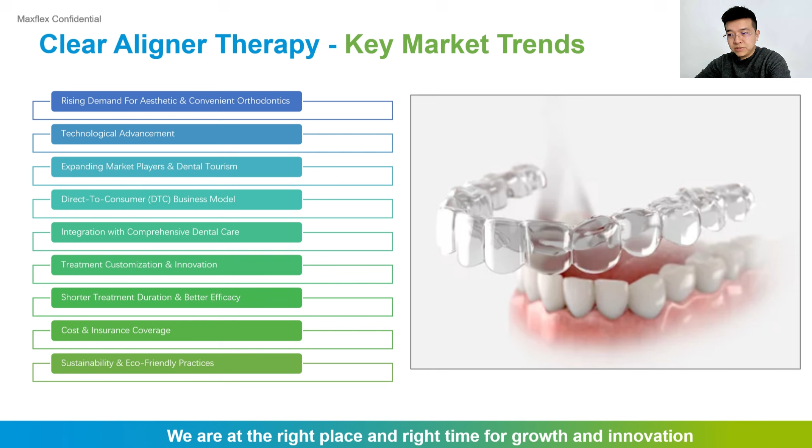Integration with comprehensive dental care, treatment innovation. Also including cost, insurance coverage, sustainability, and eco-friendly practices. Anyway, we are at the right place and right time for growth and innovation for all the participants.

As Maxflex, we are providing the most, which is based on the idea of self-determination and patient centricity. We are empowering the practice for all three roles. First is the integrated brand owners, and the dental service organizations like dental labs, clinic groups, and also the orthodontists

and GPs, general practitioners. So as we build in the aligner capabilities, we design a production journey, starting from the patient impression, data established by our intraoral scanner, treatment planning, 3D printing models, thermoforming, trimming, polishing, and delivery.

Also, when we start with the one-stop solutions, we are always doing the development things like product data analysis, material selection, processing equipment, post-process, QC control. Also very important is the product acceptance. It's a very long journey we go through, but it's very essential. As the most, the three major parts combined are the service, products, and innovation.

So today, I'm going to share the processing equipment part of the most. Also, there'll be 5 market trends for the processing centers. As we explored so many countries and regions, we found out the customer needs and the market trends: we need multiple points of production, because clear aligner is a very fast business. It requires a very fast local supply because patients and clinics don't want to wait. So close proximity to point of care is very important.

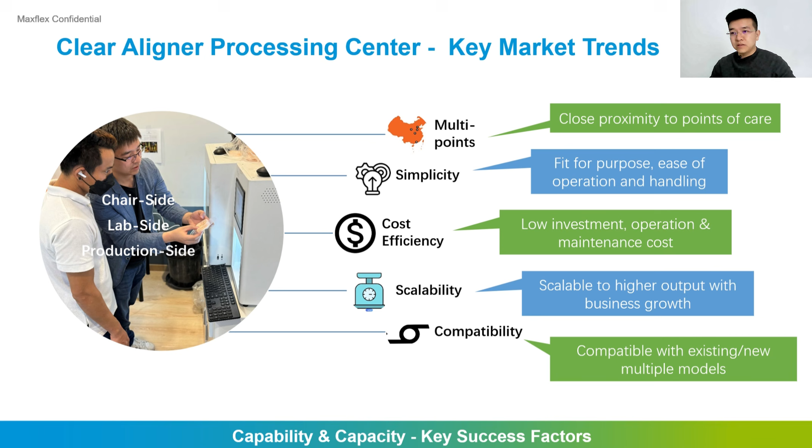The three major roles in the market have different needs. For integrated brand owners, they need special treatment cases. They even need customized materials and outsourcing innovation ability. And the dental service organizations like clinics and dental labs need a startup investment. They need multiple points, local delivery, efficiency, lead time, operation cost, scalability for growth.

This is the most important group for the most system as we explore the market trends. And the third is the GPs. They need self-reliance, operation know-how, skill set and efficiency, a steep learning curve, financial flexibility, and economy of scale. So each role has different needs, but as the most we will provide all the things.

So let's talk about the three-leg stool. As we are designing the solutions, we must have some basic ideas of how we want these solutions to look. So we have 3 major points to think about. First is efficiency. The solutions, the machines, the processing software must be as efficient as they can be for different roles. If it's very low efficiency, it's not easy to use because it's not worth it.

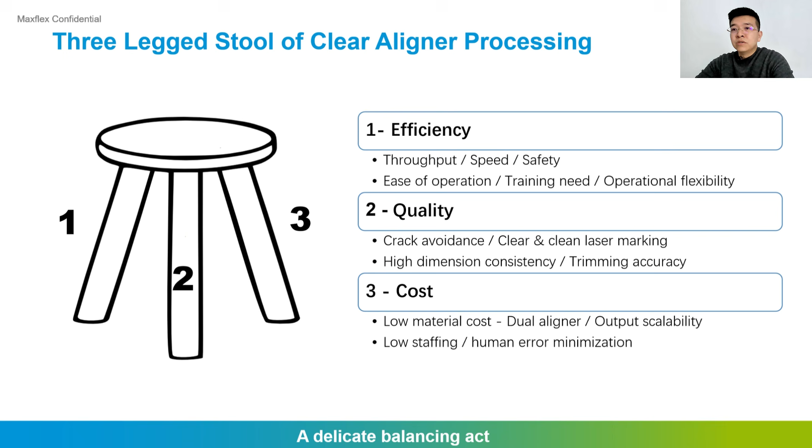So as we talk about so many market trends, the ideas about the solutions, and their needs and market demands for each role, we have the 4 major machine parts to combine as the Maxflex aligner processing solutions. First part is the printing part, also including the post-processing machines. Second is the thermoforming, Maxform L2, third is the laser marking, and fourth is the trimming. So we will expand the discussion about each part one by one.

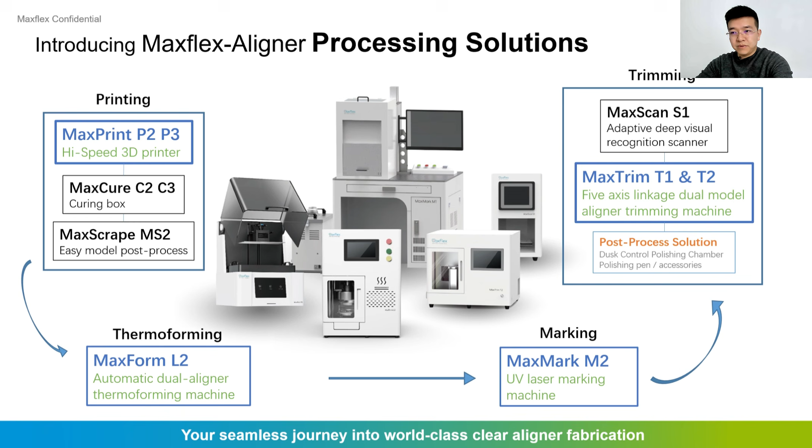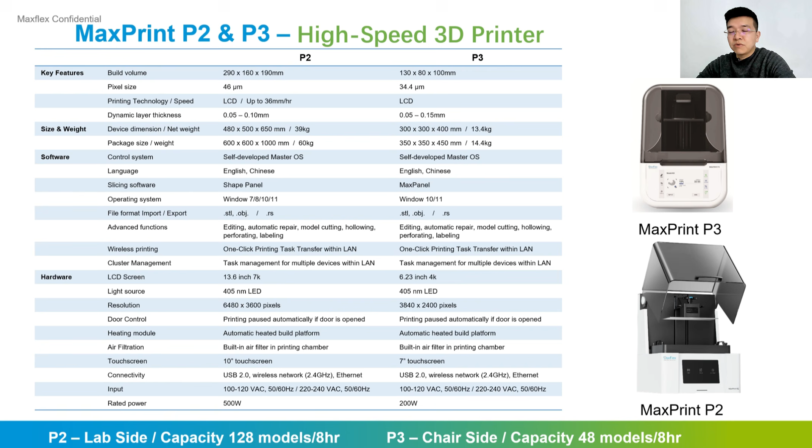So first is the printing part. We're providing the MaxPrint P2 and P3 for the market. Both of these printers are LCD printers. The MaxPrint P2 is used for the lab side, and the MaxPrint P3 is suitable for the chair side. So these 2 different printers provide 2 different roles.

As for the technology of LCD, when we were looking for the final idea about the printers for the clear aligner part, we need very good cost performance, because DLP is very good, but sometimes it's not so good at the edge, and also the cost is very high. It's always like 5 times that of LCD printers.

When we think about SLA, which is a very mature technology, it can print a lot of models at one time, but actually the time span is quite long for SLA, and for the operation part, it always needs people to manually remove the model from the printing platform, clean, and restart everything. So the manual work is really heavy for SLA printers.

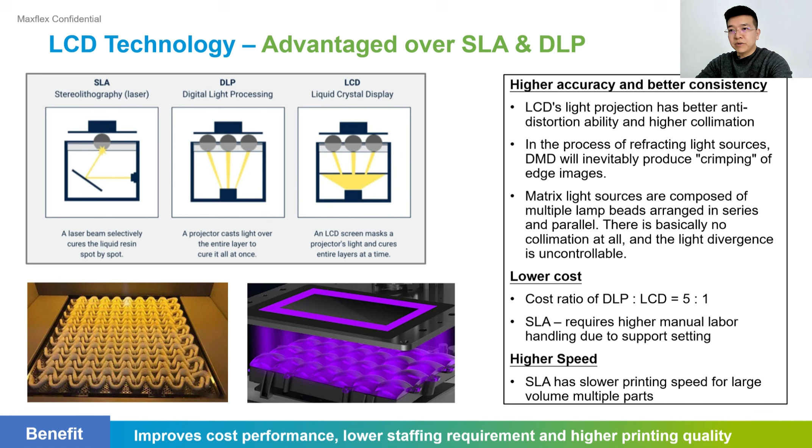So LCD printers are even better for the clear aligner part, because the cost is not so high, but the precision can be very high, even close to DLP printers. So let's see how we compare the precision of the models that we printed with LCD printers. The STL file is a widely used file format for 3-dimensional data.

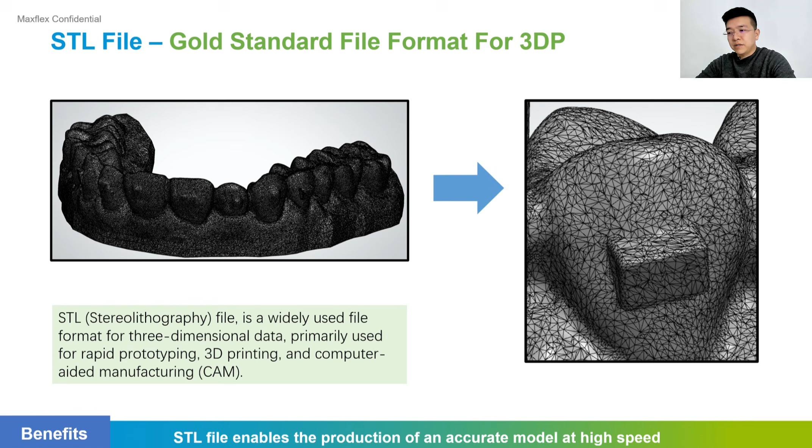Anything generated in STL is like thousands of triangle faces connected together to generate the 3D models. So each model has so many points on the surface. This is the basic idea of how we do the comparison. When we're talking about printing precision, we always need to know how we judge the printed model. Is it precise or not?

So the method for the model precision judgment is that we need to scan the models after printing and compare with the original STL file within the 0.1 to minus 0.1 range, and see how many points are out of the range of 0.1 to negative 0.1. If more than 90% of the points are within this range, we think this model has very good precision, because it's almost close to the original model based on the points.

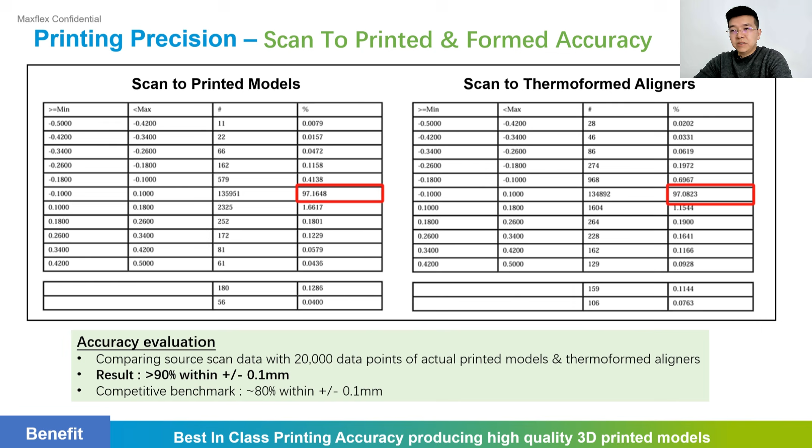So also we want to see the thermoforming results, because the final result that we get in our hand is the model that has been thermoformed. Also we need to think about it: we don't want to print solid, we want to save material. So what kind of construction do we want to use? Based on these questions, we looked for the answer.

The answer is that we prefer to use the honeycomb construction, and the thickness we can set at 2.5 millimeters. With this construction and thickness, printed with the MaxPrint P2, the result shows a 99% match to the original model. And after one thermoforming press, it's 98% compared to the original model, which is already very high.

And it's already above our standard of over 90%, because we think 90% is a general standard that fits all clear aligners for accepting the precision of the models. The second time is 93 and the third time is 86. Mostly people only do one pressing, and sometimes when you have some work that needs to be redone, you do two pressings with this construction. So these two times are already above our standard of 90%.

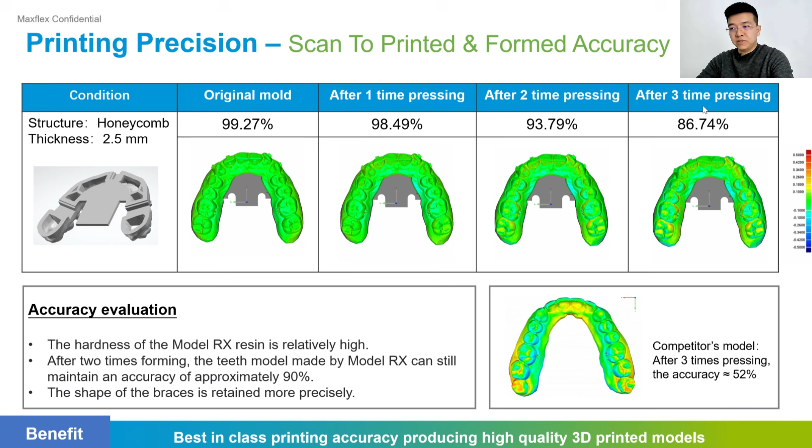Also when we look at the details of a good LCD resin, it's very smooth and clean. But with other printers, sometimes the details are really rough, so we cannot imagine if this can really fit the patient's mouth.

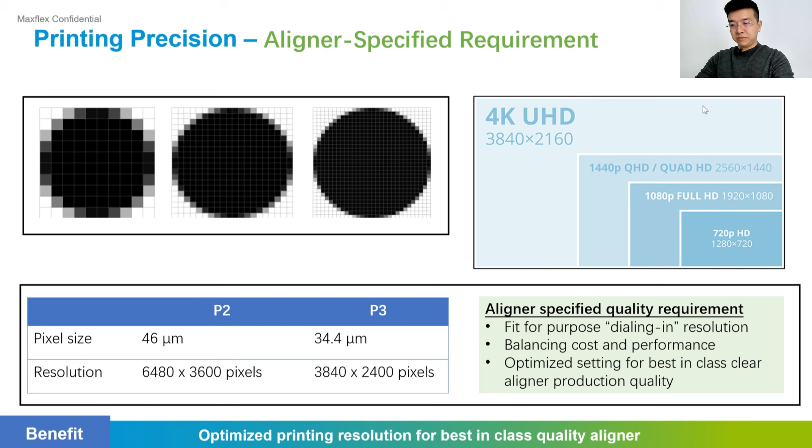So how can we guarantee the precision? We provide very high pixel screens: P2 we provide 7K and P3 we provide 4K. These two high resolution LCD screens are basically the idea to provide such precision results. And we also have the printing processes for pre-processing, build up, and post-processing. We provide the MaxPanel for slicing and doing the honeycomb constructions that all the slicing software can provide.

With the printing set, the P3 can provide two models in 20 minutes. For the clinic side, you can produce one pair of retainers, and P2 takes 40 minutes for 12 to 16 models. So in one day you can have more than 100 models per 8 hours. We also have monitoring and control for the temperature and display of print progress information.

For the post-processing part, we have the C2 and C3 for curing, with very strong LED lights. So we only need 1 minute to cure all the models after printing.

Thinking about lab production, user-friendliness is quite important. So we provide a MaxScrape machine to lab users. After you print with the P2, you can transfer the printing platform to the MaxScrape machine, and a knife cuts off all the models on the platform within 1 minute. So there is no human removal work after printing, which is much faster and easier work for the lab side.

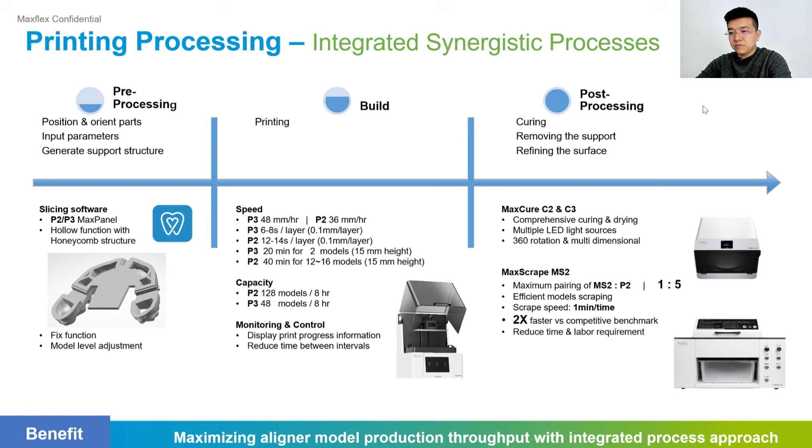So the idea for this solution is to provide a high precision model, a very user-friendly operation, and a fast printer setup. And for the printing volume, we already tested that it can hold 16 medium size models with the P2, and you can also print more or less depending on the model size.

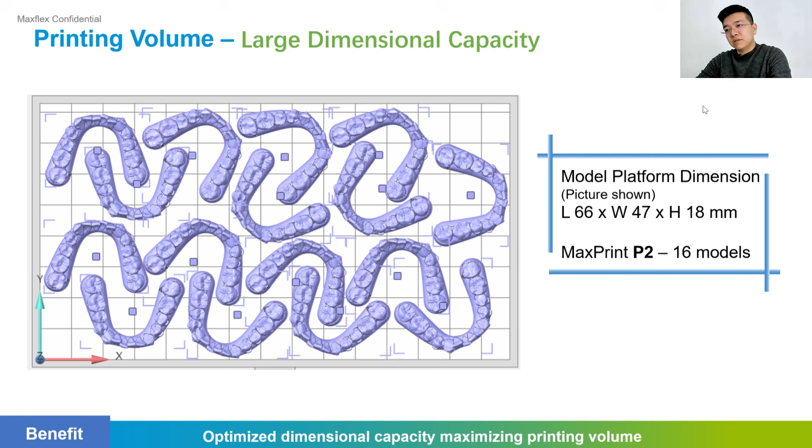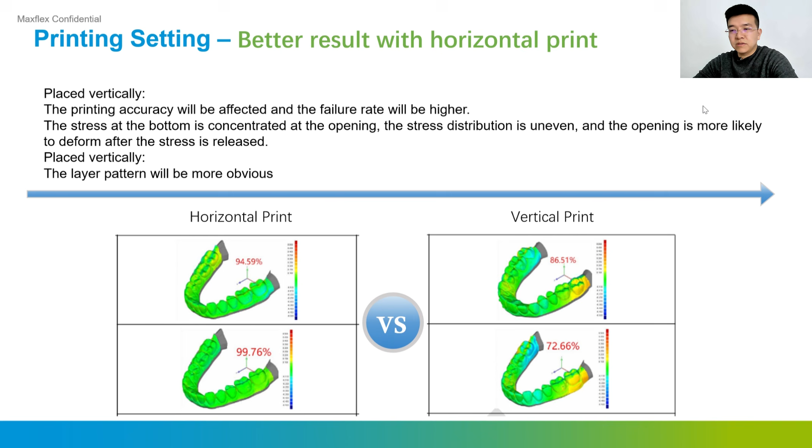We suggest always using horizontal printing. As we tested horizontal printing results compared with vertical printing, the comparison shows that horizontal printing is higher precision than vertical. When printing vertically, the construction has only two small parts connected to the printing platform, which makes it more likely for the shape to change during printing and also after curing. So we really suggest printing horizontally. It's faster, more stable, and more precise to guarantee the result compared with vertical printing.

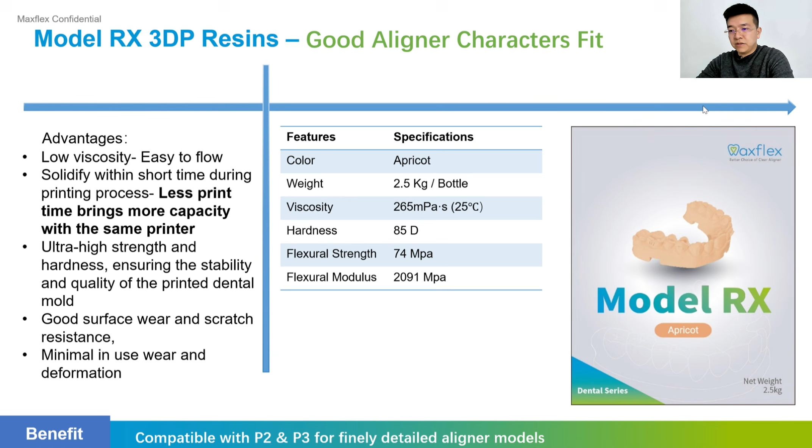The biggest advantage of the resin, and a very sensitive consideration for the user side, is the smell. If you really care about the production side, you will always think about the health of the employees. The smell is really important because a low odor resin liquid reduces VOC emissions, so it reduces health risks and improves user comfort.

But why does resin smell? Because the raw materials of low-cost resin liquid release more monomer into the air, which results in a heavier odor. Less smell provides a better environment for operation, but it brings cost. Still, we have to think about it because it's about health. We don't want the resin to cause too many problems for daily operation. Otherwise, it will increase the risk for the whole company on the employee health side.

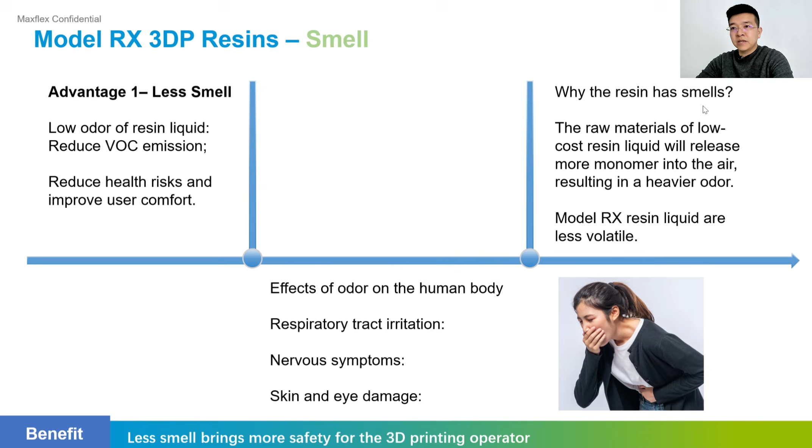When we print, accidents can happen, models fall on the ground or operations don't go well. If it breaks, you need to do the work a second time, which costs more production time. So a high success rate for printing is very important to make sure we only need to do the work one time, saving the most resin, time, and cost.

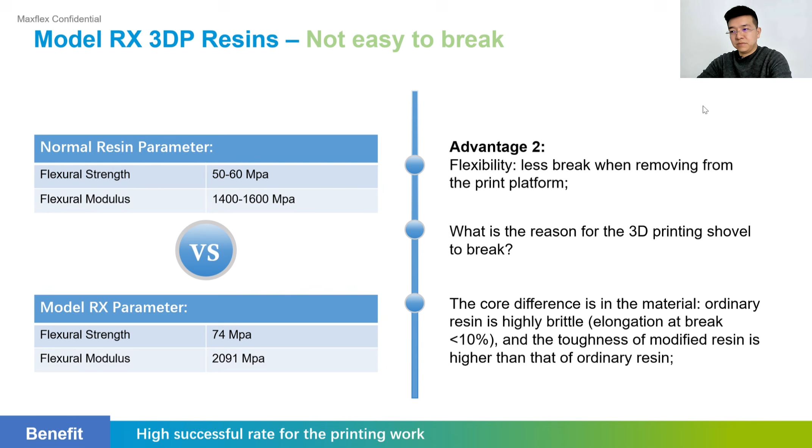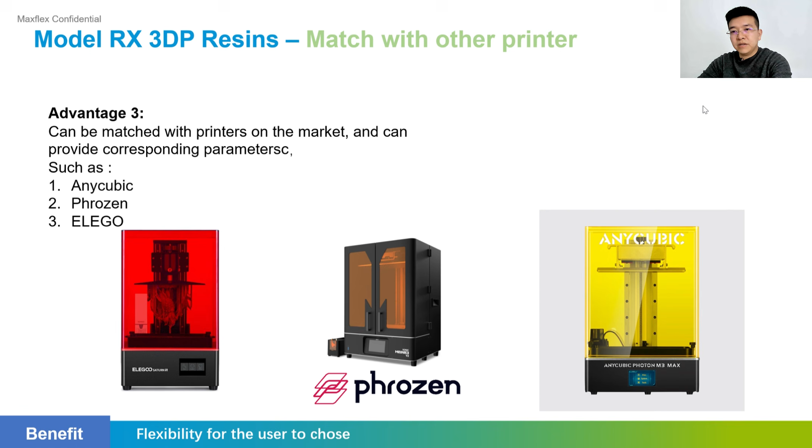Also, this resin can match with the major popular printers on the market, like Phrozen, Anycubic, and ELEGO.

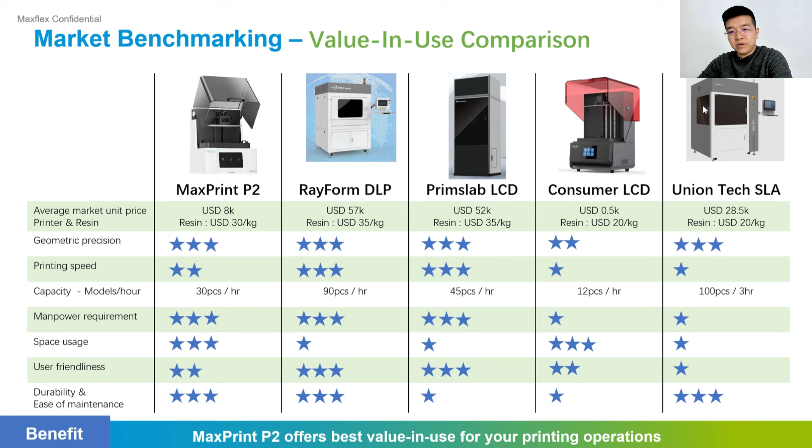Comparing with all the printers on the market, the Maxprint P2 is always good at the following points: geometry precision, printing speed, manpower requirement, space usage, user friendliness, durability, and ease of maintenance.

Many customer clients think about consumer printers because they are cheap and easy to obtain. But when comparing the four major parts between the Max Print and consumer printers, the integration of the modules is not as high as the professional part.

Also, the light source in consumer printers doesn't have very high control over the uniformity of the light, and even the cooling system is not sufficient. That's why it cannot bear long-term, long-time printing.

Also, the platform has no preheating function, so when you print in a low temperature season, the printing failure rate will rise. That's why we provide a print platform with a preheating function.

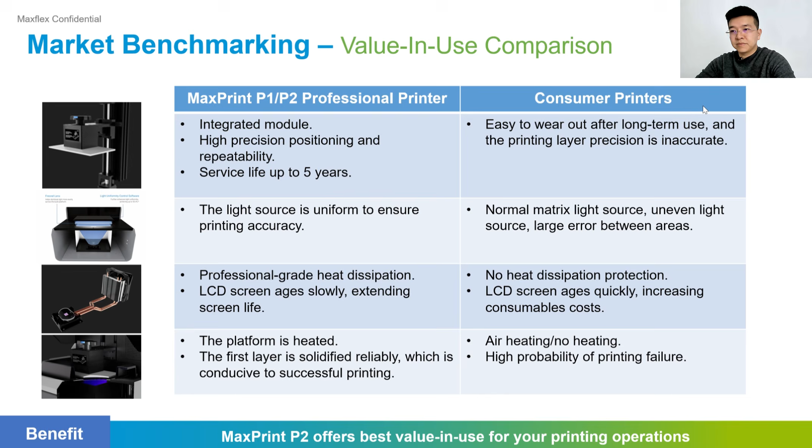All these actions make sure the operation provides a high successful printing rate. Now, talking about thermoforming, we're going to show our very famous product, the Maxform L2.

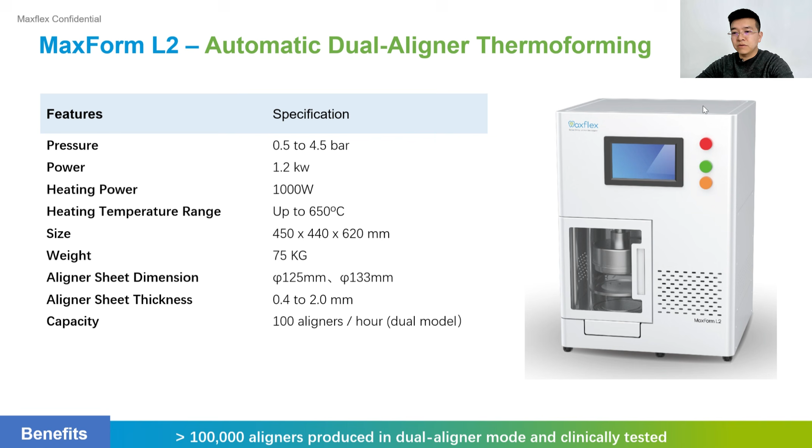The Maxform L2 is a very unique thermoforming machine. It can thermoform 125mm and 133mm sheets, and can accept sheet thickness from 0.4 to 2.0mm. It's fully automatic on the operation side.

Before talking about the machine side, its revolutionary geometry design means one sheet can provide two models of thermoforming at a certain size, which really saves 40% on material costing and even energy costs.

Because you only thermoform one time, and then you get two aligner results. Otherwise, compared with a traditional thermoforming machine, you would have two operations, meaning two times the energy cost and two times the manual operation.

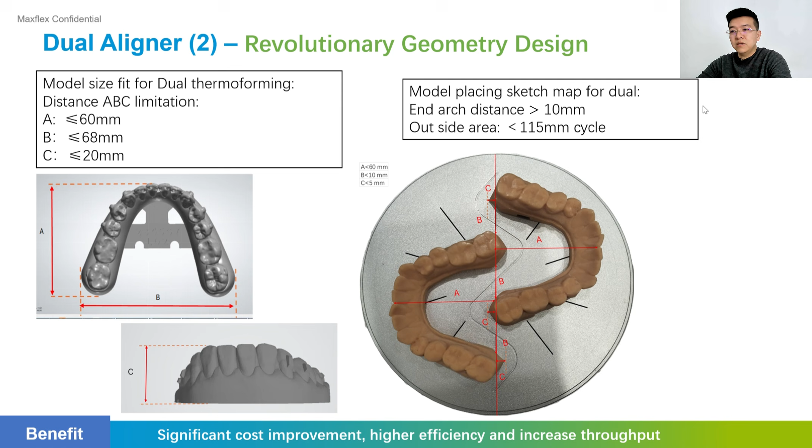For the dual thermoforming design, the size limitation we set is 68mm for the width, 60mm for the length, and 20mm for the height. For placement, we have prepared suggested areas on the thermoforming plate. Since we need to plate on two sides, we make the distance between the arches 10mm.

The reason we can provide 133 sheets for two models is that we have CT scanners to scan the thickness of the aligners after thermoforming. During R&D development of these machines, we tested a lot of results to detect the thickness.

The thickness of the aligners can be guaranteed on the front side, where the result will be close to single thermoforming results, from 0.4 to 0.66. It also depends on the different shape.

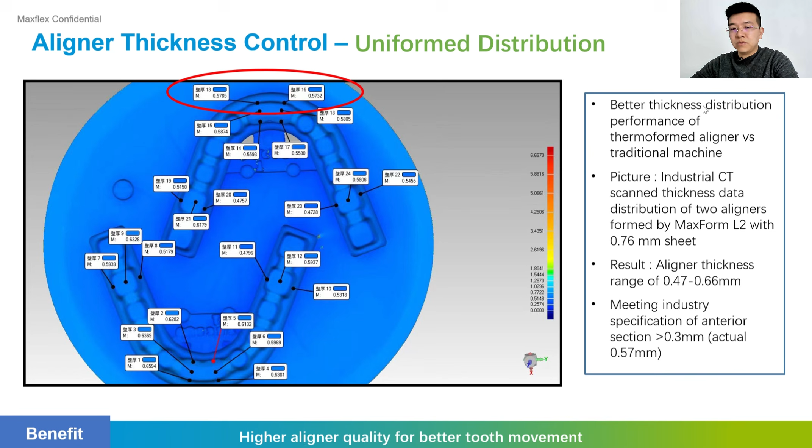But the core part of the L2 machine is the heating control system, which uses advanced ceramic heating elements. The idea of ceramic heating elements is that they provide very unique, even heating, because we always set the temperature at 500 degrees and it holds at this temperature.

Other thermoforming machines always have the electronics switching on and off, so the heater's temperature is not as even. That's why with the L2, we can guarantee each sheet goes from room temperature under the ceramic heaters and receives very similar heat throughout. This means each sheet gets similar energy from the heater, and the softness of the sheets will be close to the same.

We tested 4 points on edge and 1 point in central. This is a special design for the ceramic heaters that achieves this result. The consistent heat sheets rheological behavior is quite similar, so it will ensure uniformity of the thermoforming outcome of aligners.

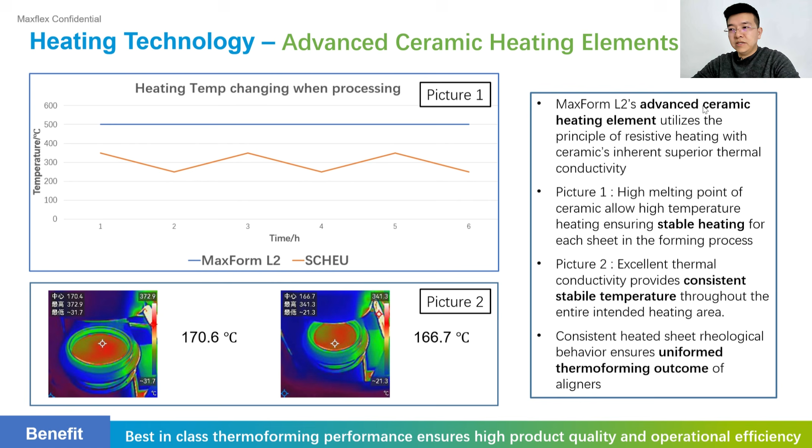That's the most important part for the MaxForm L2 thermoforming machine. It can provide very certain results to the production side, providing consistent results that ensure quality is at this level.

As we explored more ideas about these thermoforming machines and heaters, when we only use one sheet under the thermoforming heat, we observe the thickness at the lowest point, how it changes under these heaters. We can see with competitors' machines the thickness is already 0.52, while the Maxform L2 is still holding around 0.6 millimeter thickness after heating. So the thickness can be maintained more than other competitors.

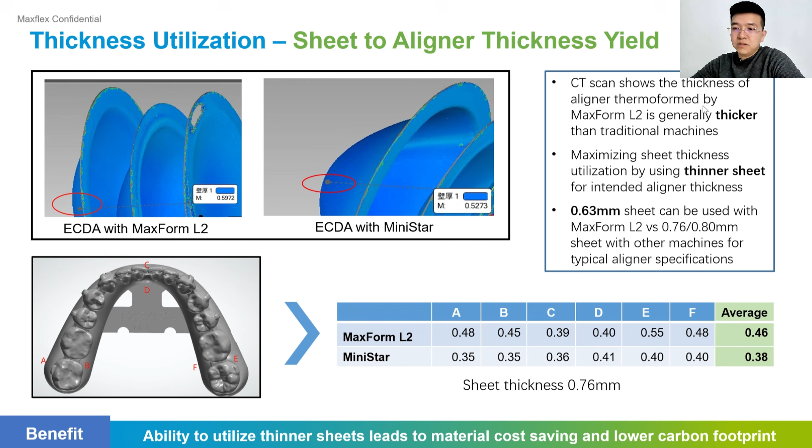As we tested with a real case, the average thickness within the sheets we use is 0.76, so the average thickness of the aligners can be thicker. Based on this, we did more tests.

We tested a higher model and a low model, comparing competitors' thermoforming machines with the L2. We also detected the thickness at the point 1 millimeter above the teeth and gingival boundary. At these 6 points, we found that aligners pressed with Maxform L2 have a thicker anterior tooth area, approximately 0.1 millimeter thicker than competitors' products, which provides better force retention for the clear aligners. For model height, it didn't show a different result.

This means that even with a higher model, we can still maintain higher thickness of the clear aligners, especially on the front side. This guarantees the treatment can be more predictable, and each step can be more precise on the patient's mouth.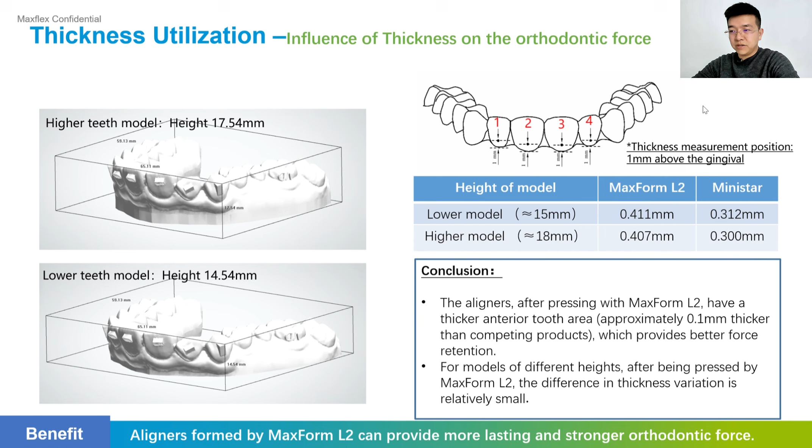So aligners formed by MaxForm L2 can provide more lasting and stronger orthodontic force than other thermoforming machines on the market. We also designed it to be very easy to change machine kits, so it can support multiple material types and thickness ranges, and can change between 125 millimeter kits and 133 round tooling, with the same machine.

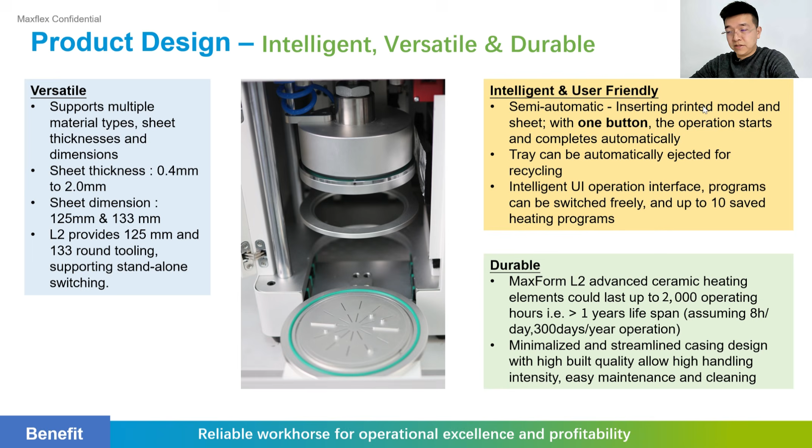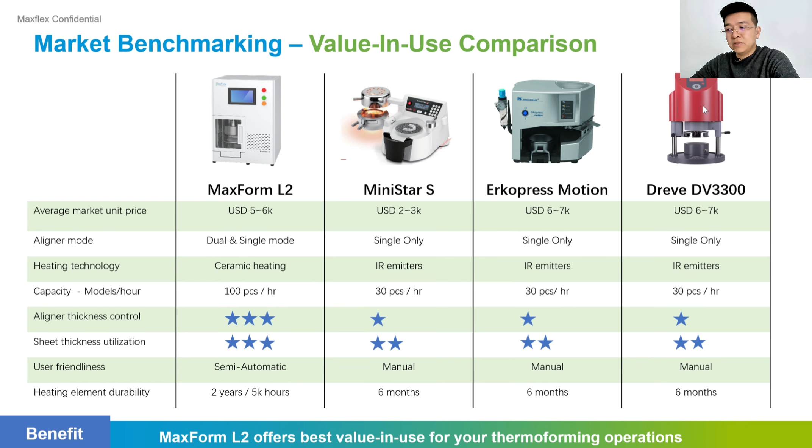Compared with the market, the MaxForm L2 thermoforming machine performs very well in aligner thickness control and sheet thickness utilization. Also, heating element durability and high aligner model production is much higher. So it will provide the best value in thermoforming operations.

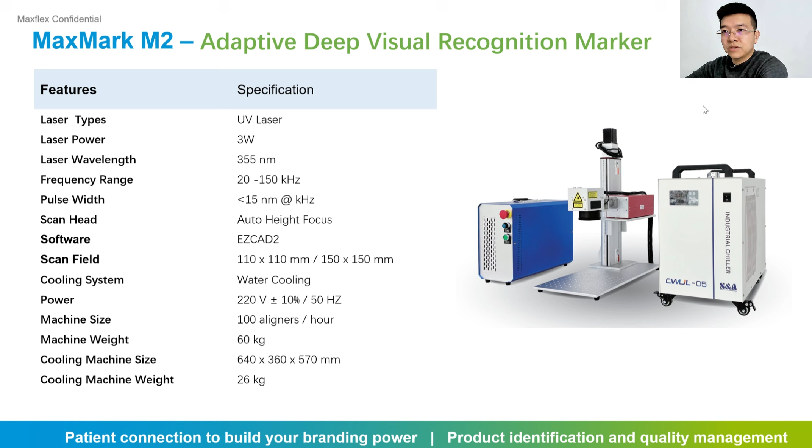Now about the MaxMark M2, the UV laser marking. In most dental labs, they need UV lasers to laser engrave information on the aligners, so we also provide such UV lasers. It's a 3 watt UV laser.

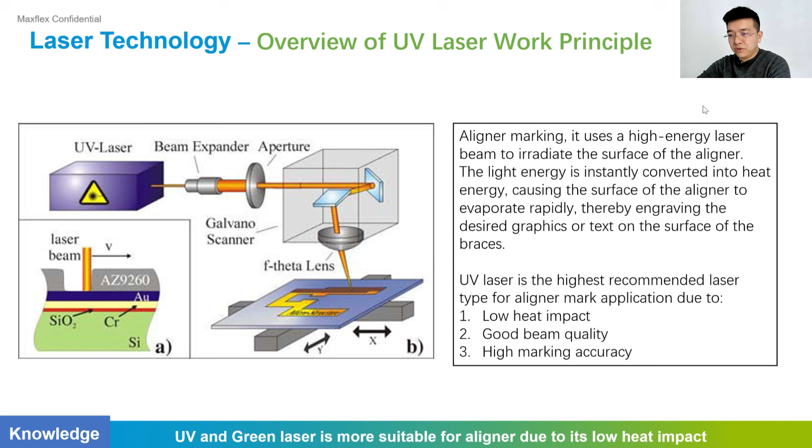We need to figure out how the UV laser works, because it's a high energy laser beam, and the result is that it can provide low heat impact, good beam quality, and high marking accuracy. There are three major lasers on the market.

First is the fiber laser, second the UV laser, and third the green laser. The fiber laser is suitable for metal laser engraving, not for plastic, and clear aligner material is actually a kind of plastic material. So the UV laser will be the best one for laser engraving plastic.

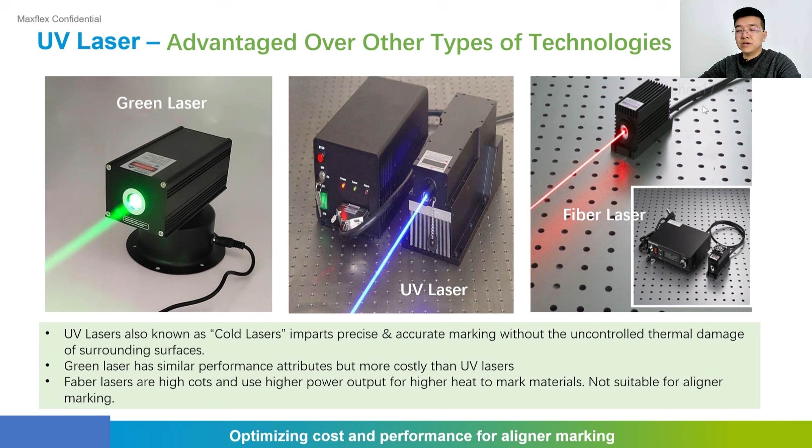But the green laser can also provide good laser marking results, though the cost is much higher than UV laser. So considering the three options and the cost, I think the UV laser will be much more sufficient and enough for lab users.

So let's see how the UV laser can laser mark. We can laser mark logos, we can laser mark patient information, and it's very reliable so you can consistently use laser marking every day.

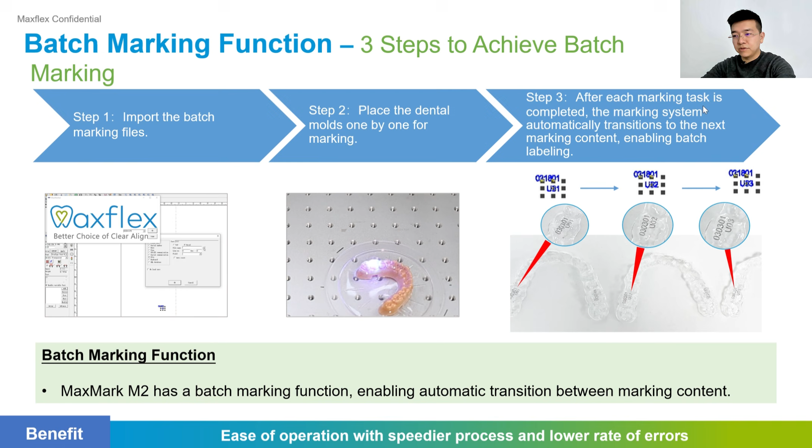So the MaxMark M2 has this function enabling automatic transition between the marking content, which operation-wise is very user friendly. And we also provide an easy setup to change the different sheets.

When we're talking about trimming, it's quite a big part of the whole aligner system. In Maxflex we typically have the T1 and T2 trimming machines. The Max Trim T1 is a 5-axis machine for single model cutting.

The capacity for trimming, we can have more than 400 pieces per 8 hours. For Max Trim T2, it can provide single model trimming or dual model trimming. The double trimming capacity can reach 800 pieces per 8 hours.

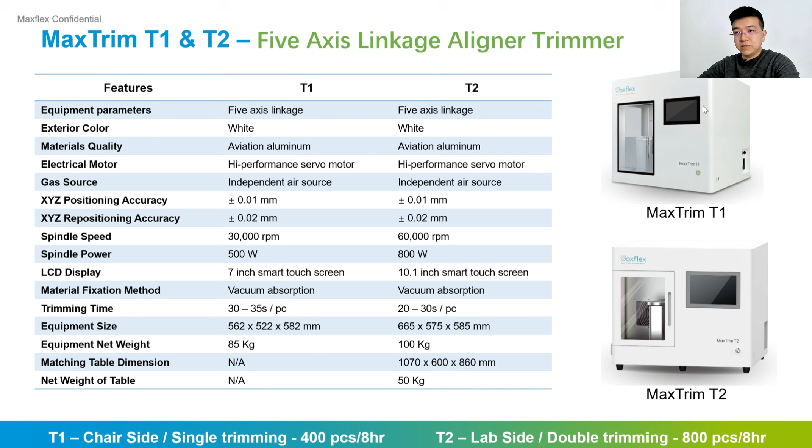Both machines have really high performance servo motors. So as we talk about aligner trimming, there's one topic that can never be removed.

That is about the cutting lines. How can we get the cutting lines? There are so many treatment software on the market, like OnyxCeph, Maestro, 3Shape, Titan, SoftSmile, Nemocast.

We've already integrated with more than 10 design treatment software so they can export the trimming models with our Maxflex trimming fixtures and cutting lines. And we also provide our own software.

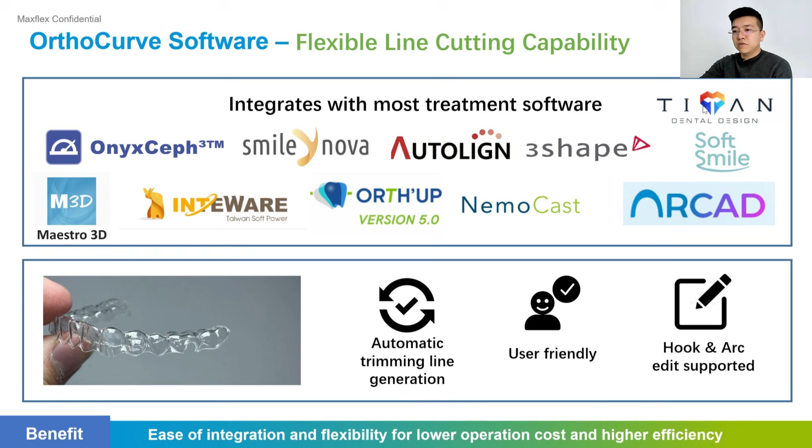So first, we already have these partners that can provide the trimming systems with cutting lines directly, which is the most suggested and efficient way for users to use the trimming machines and do their work. Maxflex has a trimming system with 4 fixture shapes.

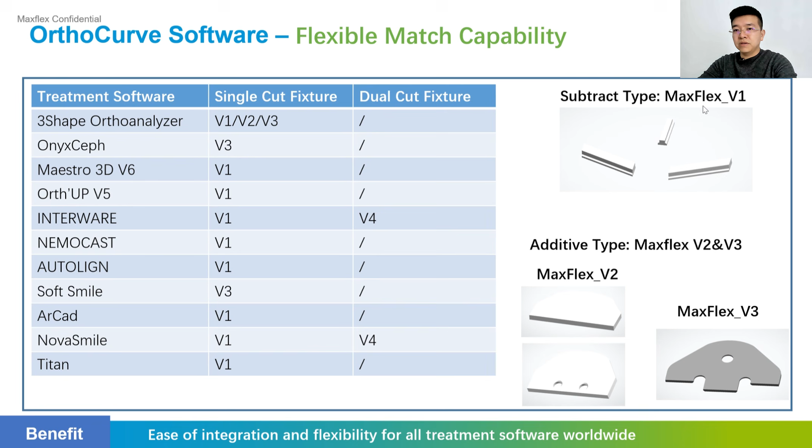First, the V1 is a subtractive type of Maxflex, which is the most popular one. Then we have the additive type with Maxflex V2 and V3. We also have the dual-cut fixture for dual cutting. So this is the whole Maxflex fixture system.

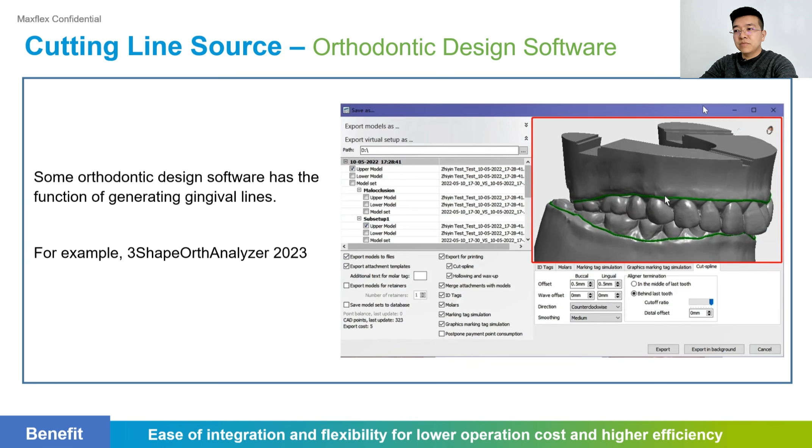We can also see that when using different orthodontic design software, there will be a page showing the cutting lines, like 3Shape. So the trimming line from the treatment software will be much easier.

But anyway, we will provide another software called OrthoCurve software that can provide the flexible cutting line. OrthoCurve is self-developed by the Maxflex software team, and it can provide two functions.

First is the automatic calculation function. As the model is a separate model with teeth and gingiva, it can automatically generate the cutting lines. And if the model is a unique model where the teeth and gingiva are connected, then...

We can provide a semi-auto calculation function where we only need to draw the first model, and the rest of the models can be generated automatically. Then we do a little adjustment to fix the moved teeth, and export. These two functions can fit any treatment, any models around the world, which is very flexible and easy to use.

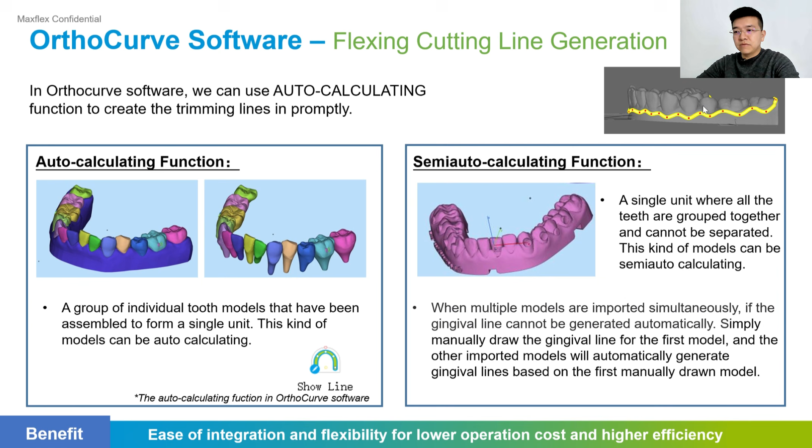So, the software about the trimming line styles. The trimming line is the most important component of the trimming plan. The quality of the trimming line directly affects the quality of the aligner obtained from the final cutting.

The source of the trimming line data is first from the design software, and secondly from third-party software like OrthoCurve.

For trimming line types, generally we have the scalloped cut for both sides, which is like the Invisalign style. Secondly is the straight cut for both sides, which clinics will prefer more because they need more material to remain on the clear aligner to provide consistent force, compared with scalloped both sides.

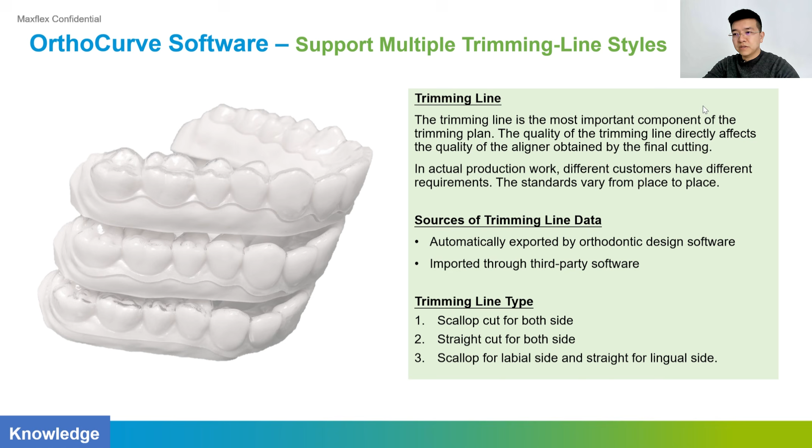The third is scalloped for the labial side and straight for the lingual side. This is more common because we need a good look on the labial side, and we want more material for treatment on the lingual side. Different companies have different ideas about the trimming line styles.

Also, in the dual placement, we have a very special setup for the dual model setup, to set the model's locations in the thermoforming place.

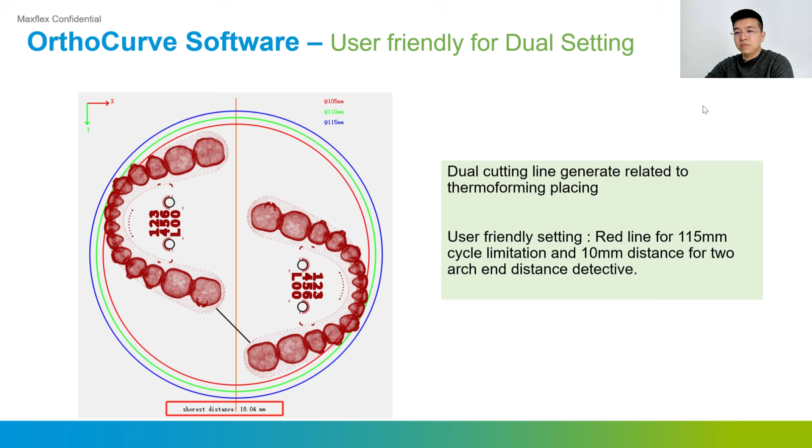It will be pre-prepared in the software. Also, the precision, how can we guarantee the precision? First, mechanically, the machine has XYZ positioning accuracy of 0.01 millimeter, and the repeat precision is 0.02 millimeter, which is very sufficient for the clear aligner cut.

And also we provide a visualized function to define the trimming line with high precision. The yellow points are the real size of the diameter of the trimming burr. So every inner side of the yellow point is the actual cutting area of the models on the software side. So the users can directly judge where they want to cut, and can more easily set up the distance, the boundary of the teeth and gingiva, and the rear cut.

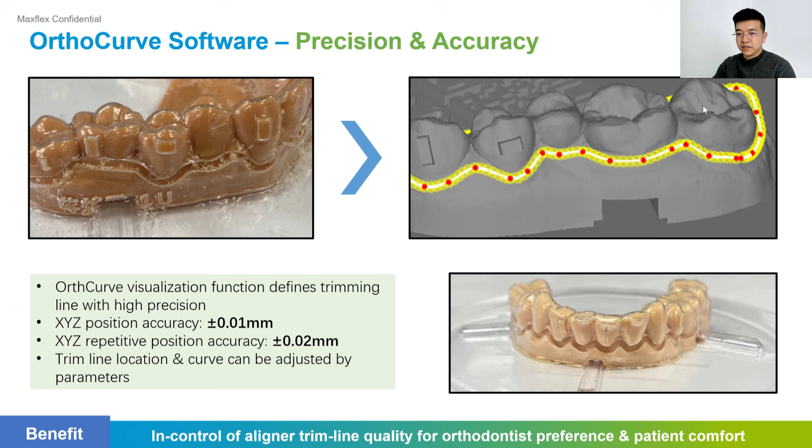And the cutting results. With the MaxTrim, the cutting edge is really smooth and clean, almost burr-free. But with other trimming machines, sometimes the errors cannot be guaranteed. The cutting speed for the scallop is a little bit longer than the straight, and we always consider the cycle time of the operation.

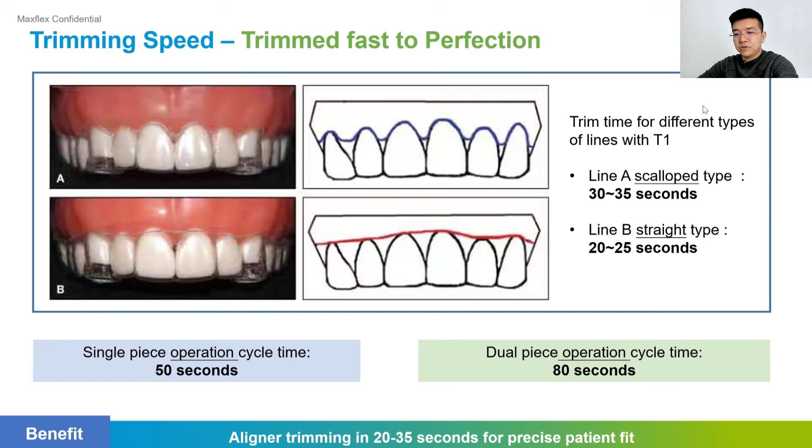So single trimming, we can say it's 50 seconds for the operation, one model from putting the model in to the aligner cut off and taken off. And dual cutting takes around 1.5 minutes, like 80 seconds. So it's a very high operation speed compared with other trimming systems.

And the biggest advantage for the trimming parts of the Maxflex series is that we use vacuum absorption stability sections to provide a very strong fix of the models on the trimming platform. So with these models, we have the rubber ring to make sure this will provide a vacuum. When we do the trimming, we first fix these models by the vacuum and rubber rings. So the strength in the vertical direction is more than 100 newtons.

So it's very strong to fix these models on the platform, which makes sure the cutting can have very good precision. And also the servo motor is a very important part, because servo motors are more reliable and have memory functions to make the customer operation much easier, because we don't need to open the machine and do a reference run or preparations. We just need to open it and directly use it. So it will be much more helpful for general users.

While with stepper motors, sometimes it's very easy to not perceive the load changes. So that's why it will cause some failures. We all know that aligner production is very important every day, because you cannot stop. So as long as the machine needs no preparation work and works directly, it will never give you the chance to have machine startup issues at the beginning of the day.

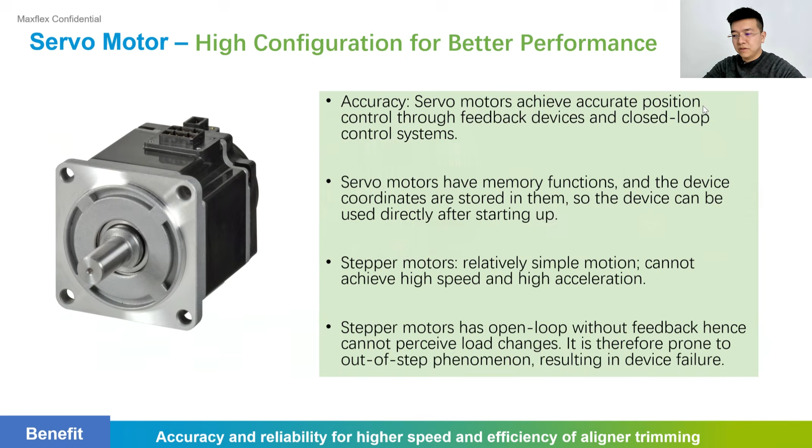We know that clear aligner production is a very huge work. Every day you have hundreds of models to trim, to thermoform, to print. So when loading the files, how easily we can let the machine work and build up a good workflow is also important. So we provide the barcode scan function, where a label printer prints the label, and after thermoforming, we can stick the labels on each thermoforming sheet.

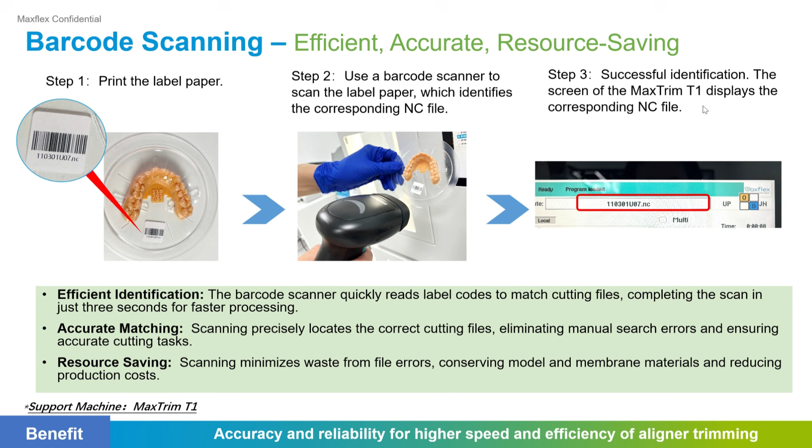So the scanner can scan the code, and then the machine can automatically grab the trimming files. So these operations provide efficient identification and accurate matching, so no models can be selected wrongly to cause collisions on the machine. And also the results can be saved, like how many models we have each day. So we support the MaxTrim T1 and also T2.

And for the T2, we even provide a higher level of spindle. It can provide cooling all the time when we do the trimming, it's easy for tool changing, and the spindle has a very long service life. It's equipped with debris blowing functions to prevent dust buildup, saving cleaning time and protecting the tools.

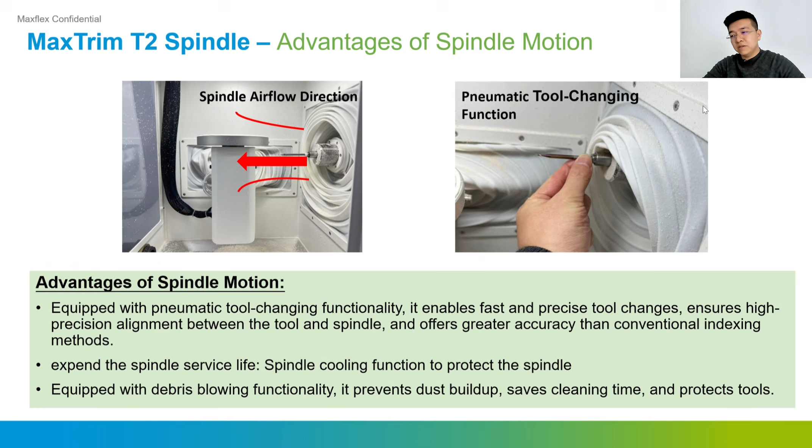So talking about the dual trimming, when we have mixed productions, we can provide the MaxScan, especially for the T2, so when we put on the two models, we can put the models without sequence. So we can put number 1 on the left and number 5, for example, on the right. So when we put two models together and thermoform, the MaxScan can identify the two models on this sheet and calculate the trimming file to the machine directly.

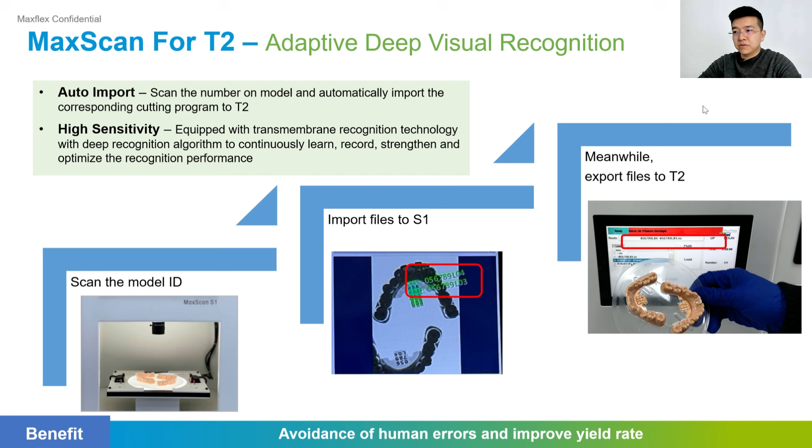So it provides production flexibility for operation on the thermoforming and the trimming, avoids human errors, and improves the yield rate, because the models will only be identified by the model itself.

We also provide the manual dual trimming operation, which means that we let the software export the dual models in sequence. So we will put the number 1 models on the left and the number 2 models on the right. So 1 and 2 will be a group, and 3 and 4 will be one group. So we put the models in sequence when we do the thermoforming, and also prepare the NC files in the PC. So when we put these models into the trimmer, every model has its sequence and the corresponding NCs.

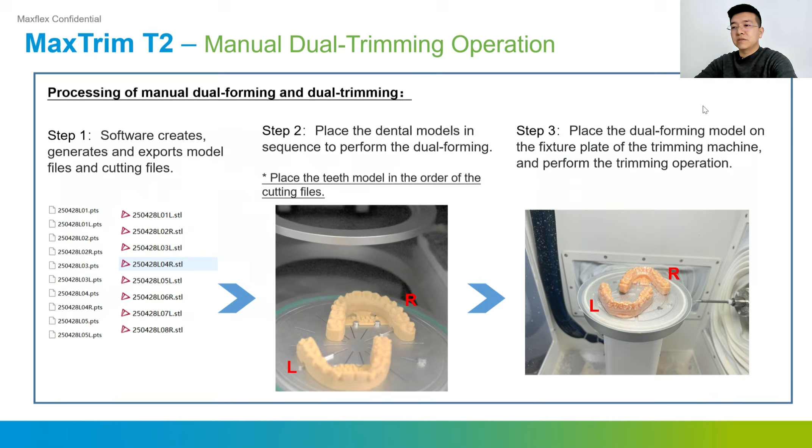So it will also provide a very good result without the MaxScan machines, but it will require the operators to put these models in sequence. It's really the world's first dual model trimming, and really fast and cost saving for the production side. As we know, the biggest consumption is dental sheets.

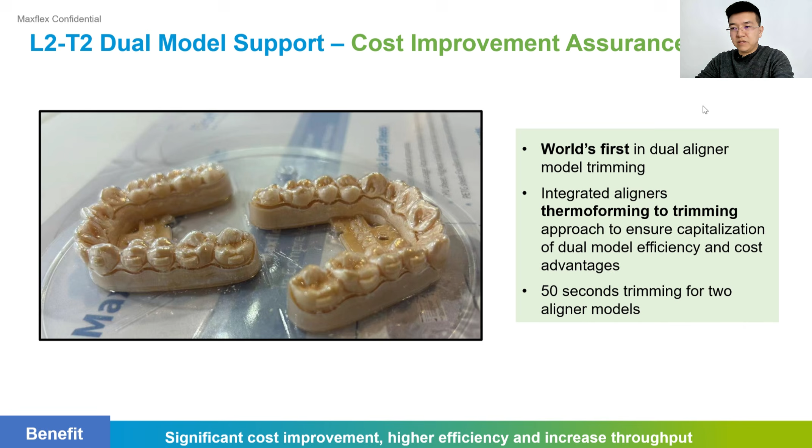So as a sheet provider, we will try our best to provide as much efficiency and cost performance solutions for all our users. It doesn't mean that we don't want to sell more sheets, but in these dual solutions, we just want to provide as many benefits as the users can have.

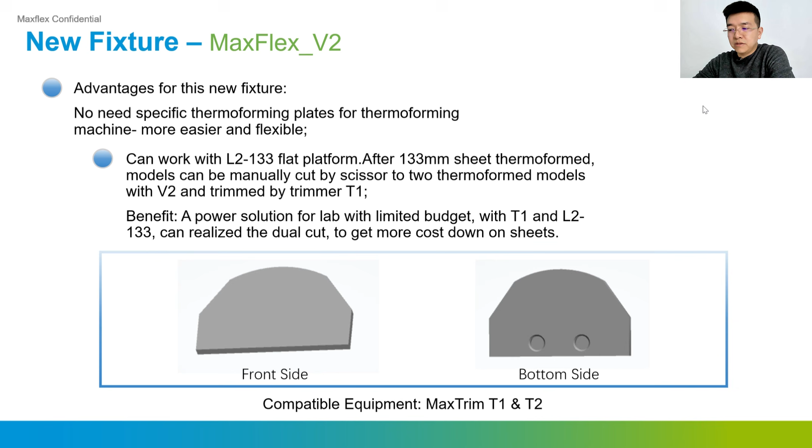And also, we provide a new Maxflex V2 fixture, as we have already shown on the previous page, and these fixtures can work with 133 sheets with a flat platform directly. So the sheets can thermoform the models on the flat platform, and after thermoforming, we can cut the sheets to separate the two parts, and we can insert one model on the MaxTrim T1 with the V2

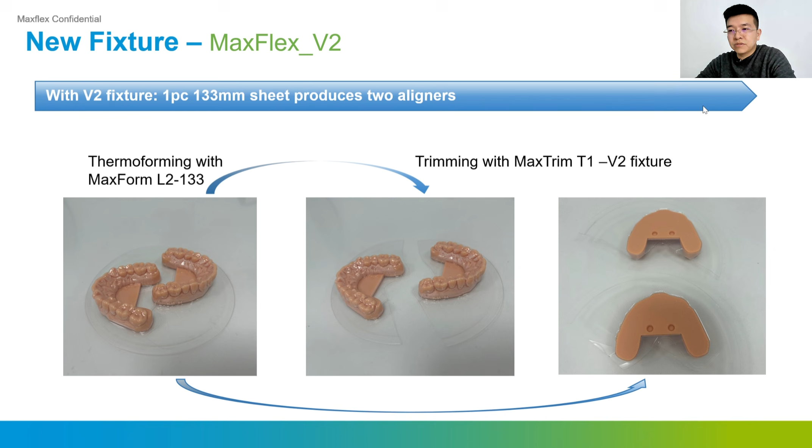fixtures to directly cut, which means that the users can have more flexibility to select each model, and then they can have the T1 machines do the dual cutting, which will provide a lower machine investment in the beginning. So this will also be a very good selection for the user side.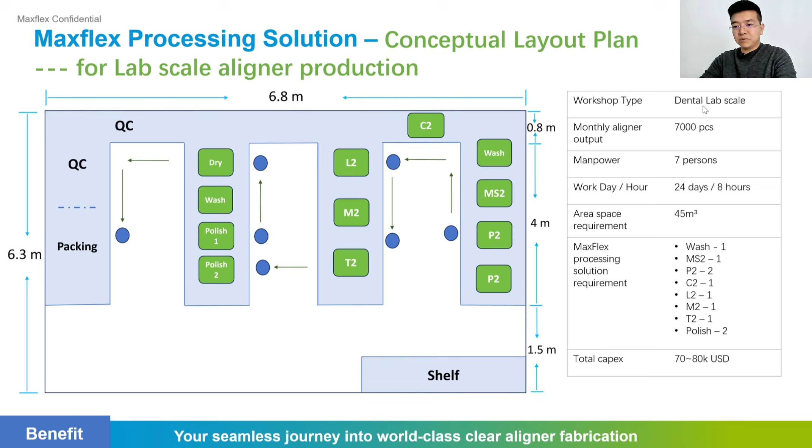So it's printers, wash, Max scraping, scrap machines. The C2 is curing, L2 thermoforming, laser marking, trimming, and we have the polishing and wash and drying, with QC and packing. So this is briefly the layout for the aligner production setup, to give an idea about how this production can be set up.

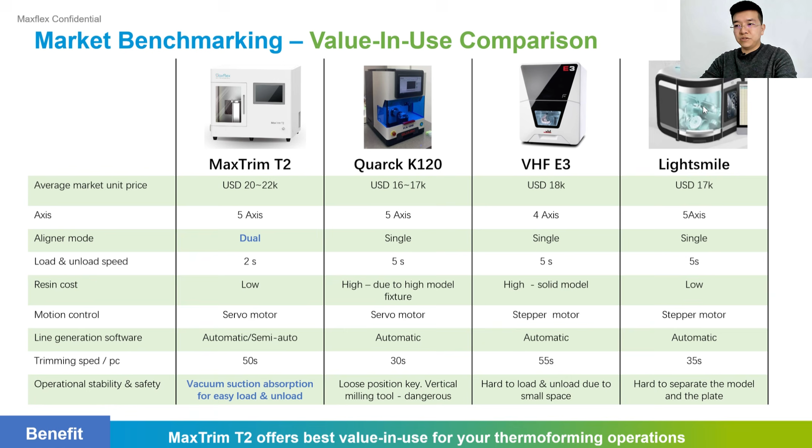And also the trimming machine comparison: the T2 is very strongly advantageous compared with other machines on the market. So the core values for the one-stop processing solution, and also for the whole company, are that we really base it on innovation, performance and the cost of ownership.

As you can feel how hard we are working on the dual thermoforming and dual trimming, because we really want to provide our customers a very good cost of ownership, performance and choice on the production side, and the innovation that we are trying our best to do with dual thermoforming and trimming. And this is basically based on the research and the R&D that we have made. It's not just that we do this and give an uncertain result.

And the quality and efficiency are also guaranteed. We are working to provide basically the standard for each step. Like the printers, we want 90% similarity compared with the models, and for the aligner thermoforming, we want uniform thermoforming heaters, and we want the thickness of the front side to be more than 0.3 millimeter.

And for the trimming, we want the trimming lines to be more precise. So that's why we use vacuum absorption, and we want the cutting lines to be visible in the software. And we provide efficiency in that we match with so many treatment softwares in the world. So we want to give users easier flexibility, time-saving solutions, and also the dual trimming. So everything we do is based on these 4 value points.